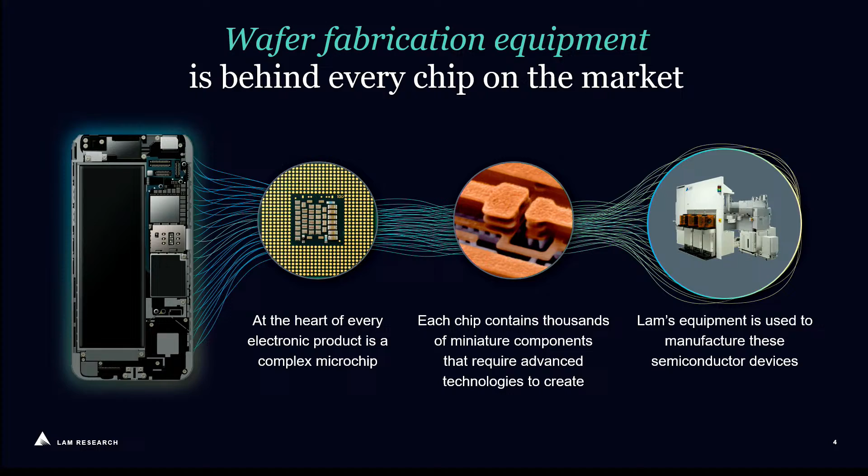In making these processes, there is about 600 to 800 steps, and through these steps you go through multiple steps of patterning, depositing the film that you want, patterning what you want, clean step, and go to the next cycle. Each one of these is becoming more and more critical and difficult than it was before.

When you look at a very simple way of doing it, you're effectively depositing a film that you want to leave on the wafer. You use lithography to transfer a pattern onto a mask that you want to do. You etch and you transfer that mask onto the layer below. You clean, you strip, and you go back to the next step. This step repeats multiple times as you build the devices that you're doing.

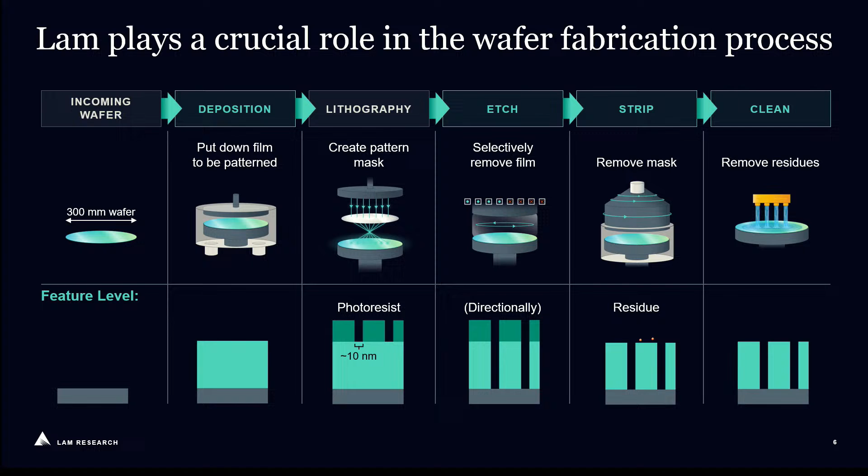Lam Research today is actually a critical player in etch, deposition, strip, and clean, provider of equipment that we have for our customers to be able to do this.

A little bit about Lam Research: the company has been around for 45 years, so 1980 was when it actually came on the scene. At the time, it started out in Fremont, California. Today, the company is about 19,000 employees. We have R&D centers in Fremont, California, about 40 minutes from here, in Oregon, in Europe, as well as close to our customers in Korea, Taiwan, and other places. We have manufacturing sites all around the world. Last year, our revenue was about $16.2 billion, and our R&D budget was about $2 billion.

Quite a bit of that work that we do, of that R&D budget, goes into fueling the foundation for the next generation innovations that we do. But part of that we also use for partnering with university and academia, funding projects in universities, academia, and research centers to be able to jumpstart and fuel the innovations that we need for the next node.

So we have many active collaborations, and over the past, I would say since 2015, we have funded more than 200 projects around the world. And Berkeley is, of all the collaborations that we have, very unique to us because, one, of the proximity, two, the great faculty and students that are here, and three, the ecosystem that's around us as well as at Berkeley.

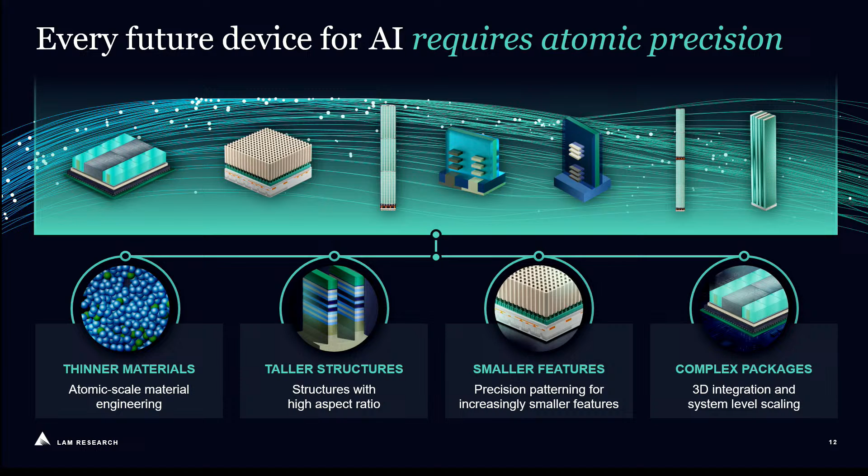Those requirements, in turn, translate into the requirements for thinner and thinner materials that we need to deposit and develop, which basically means that we're getting into atomic scale material engineering with angstrom level precision that our customers need to be able to put these things into production. Taller and taller aspect ratios, more and more patterning, as well as more complex packaging that's required to be able to make these devices, put them together, and integrate as fast as possible. So in a sense, when we look at the requirements, these are the things that drive our roadmap. We need to develop the next generation equipment that can deal with these types of requirements.

Today, the most advanced GPUs are produced with 4 nanometer and 3 nanometer technology in high volume manufacturing, and that relies on FinFET technology. As we go beyond that, next year, 2 nanometer technology, which is gate-all-around technology, will transition into high volume manufacturing. And after that, the next generation gate-all-around, as well as CFETs, would come. These will basically take us into the early part of the next decade as it happens. So today, the state-of-the-art technology in volume manufacturing for GPUs relies on this FinFET.

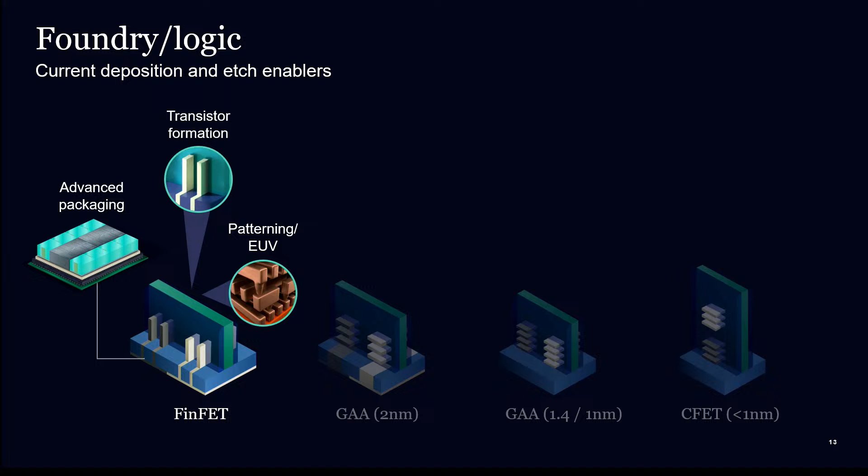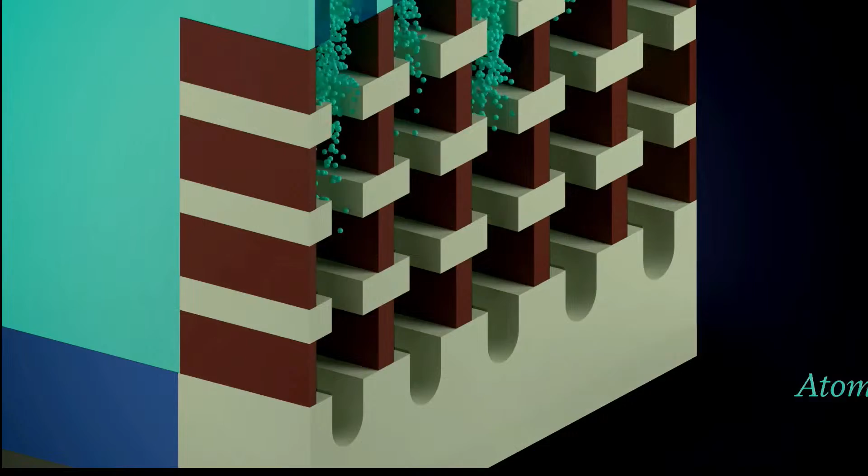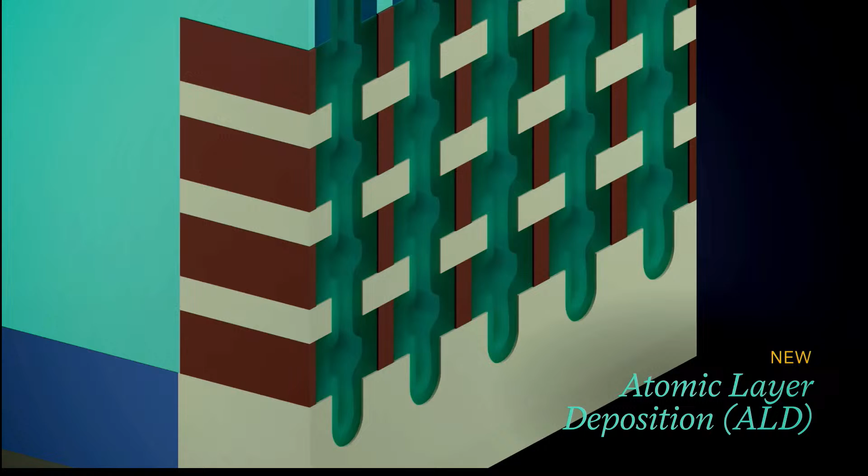So let's take a look at the requirements for the next generation as we go forward. Building the gate-all-around structure requires a number of specialized atomic layer processes, such as selectively etching between the channels, one layer at a time, and using ALD to form the spacer in between them. These processes become even more difficult at the next node because the device gets taller and smaller.

In addition to shrinking the transistors, the wires that connect them together also need to scale. When building such small wires, only dozens of atoms across, many things can go wrong. New EUV patterning technologies reduce these errors and defects. Another approach to scaling is to reduce the complexity of the wiring. Traditionally, the power and signal wires are intertwined. Moving the power wires to the wafer's backside reduces congestion and improves performance. This requires even more copper plating.

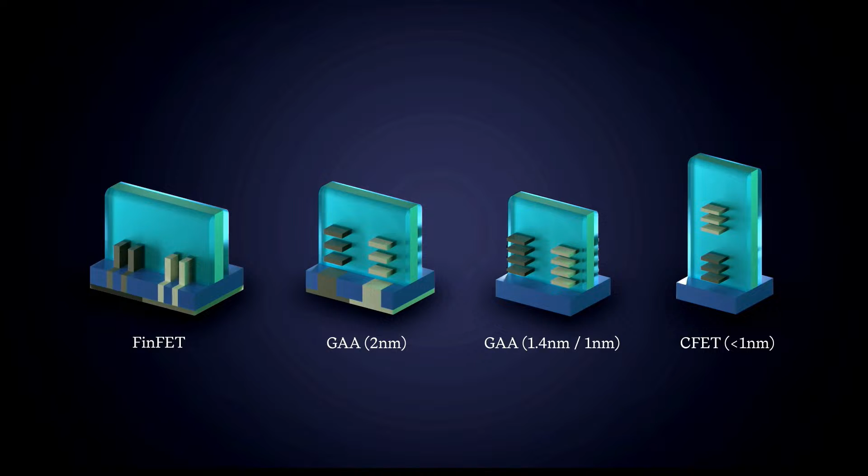Back at the transistor level, the CFET inflection will require even taller structures and additional wiring with more deposition and etch, which will enable the logic scaling journey to continue to the point where there are more transistors on a single chip than 50 times the number of pizza slices eaten in New York City in a year.

So that's what's coming to us. This is the roadmap, at least that our customers have until the end of this decade and beyond that. CFETs will probably go into production by early 2030s.

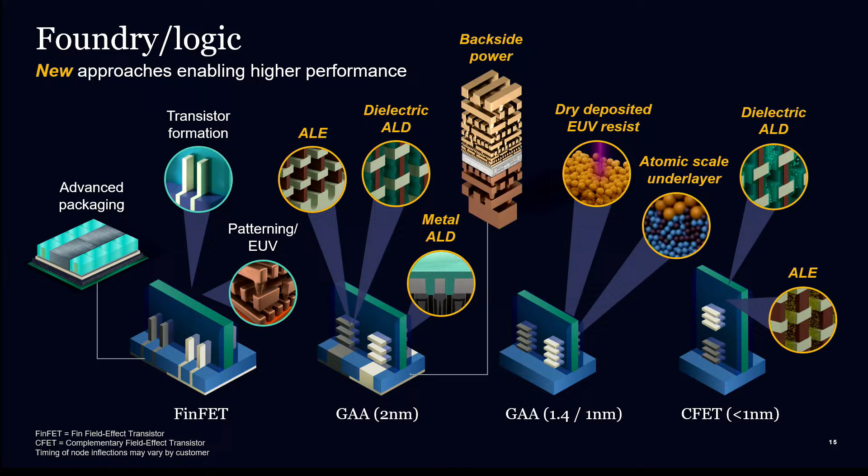One thing you notice is as we move from FinFET into gate-all-around and after that to CFET, you saw how the structuring is done. But you see that the films are becoming thinner and thinner, and a lot of new applications coming in with acronyms like ALE and ALD. There are multiple places where you see these things. So when we think about the future, as we try to make this transition to the next nodes, these are what we see as the grand challenges that this industry is working through to resolve.

One of them is atomic scale precision - films that need to be so thin that they're really not films anymore. They're almost an interface, about 1 to 2 nanometers across, with angstrom level precision that you need to have. I'll talk about this in a bit.

And sustainability - how do we make what we're actually working on more and more sustainable? And last but not least, speed to solution - we need to be able to develop these solutions faster and faster than before. So there are many challenges for the equipment industry as well as for our customers to scale, but these are the three grand challenges that today I wanted to focus on with you.

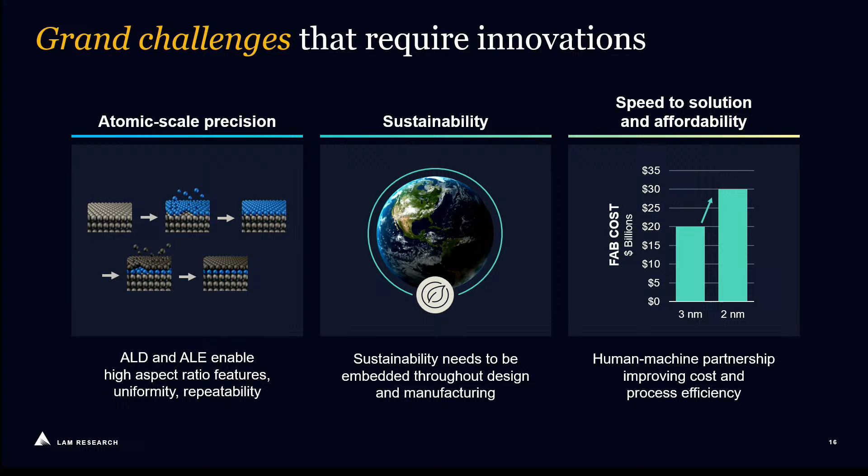Atomic scale precision - so what is ALE? ALE is atomic layer etching, a technique developed to remove one layer of material at a time. Consider a very simple example of silicon etching.

You have crystalline silicon here. If you can bring in halogens to the surface and run long enough time that the halogens occupy every site, giving complete coverage, you get to a saturation regime, and you need to wait until this happens - you run it long enough to give complete coverage to the surface. Then after that, you bring in ions with a very controlled amount of energy to just remove the halogenated layer, not enough to damage the bond below that.

By doing this, you can remove one layer, and then you cycle. It becomes atomic layer etching when you give enough time for the halogens to saturate the surface and enough time for the ions to saturate, and then you go through the cycle over and over again.

When you start depositing films that are only a few nanometers, and you want to remove 1 nanometer of that, you have very little budget to mess with that film, so you need to remove it very, very precisely and in a controllable manner.

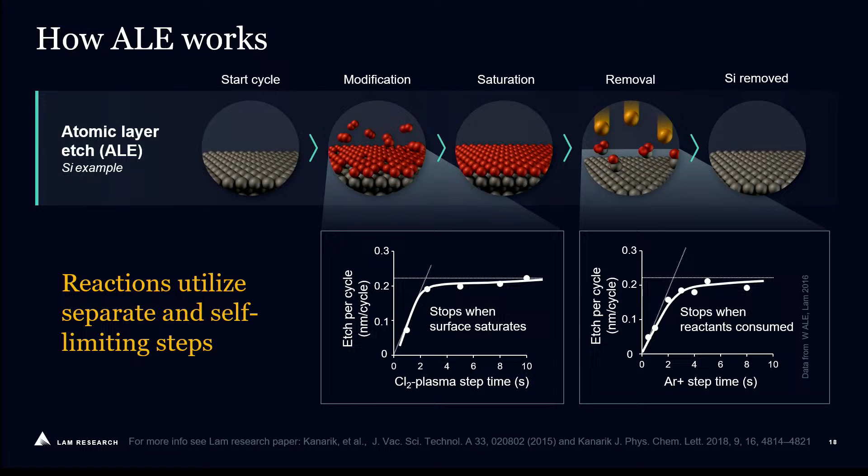So there are techniques, atomic layer etching, that today our customers actually run in production. Obviously, you don't need it for every application - if you don't need that level of precision, you don't necessarily need to do atomic layer etching, but these techniques exist today and are in production.

You can now generalize this concept to atomic layer deposition, where you bring in 2 different precursors to the surface - one to saturate, another to convert - and then cycle.

Or you can also do the same thing with atomic layer etching in an isotropic way, bringing in 2 different species to the surface to convert and then remove, convert and remove. Ideally, it depends on what you're trying to do.

With ALD, it is typically conformal because you deposit it very conformally over the whole structure. So you deposit a very conformal film that has the same thickness whether you're in a small area or large area, at the bottom and at the top.

When you're doing anisotropic or directional ALE, you're only removing the bottom and you have anisotropy, so you go down. When you're doing isotropic ALE, you remove the same amount from all surfaces in a very controlled fashion, but regardless of the spacing, without distinguishing sidewall and bottom.

So we need to develop these types of techniques as we go into the next generation. Gate-all-around and 3D transistors all need these types of techniques as we go through it.

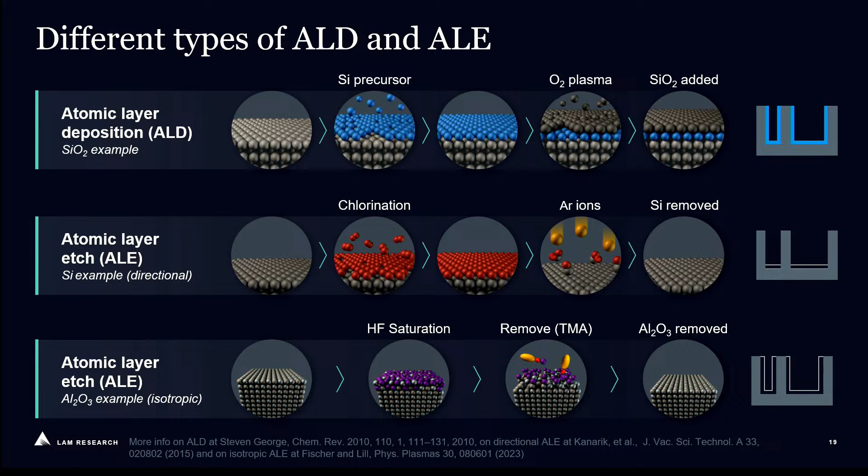So the good thing about ALE and ALD is that you can actually etch or deposit, in this case, the same amount, whether it's small features or large features. You can do a conformal coating, and in the case of ALE, you can etch to the same depth regardless of the opening.

You can deposit it very uniformly across the wafer, with wafer-to-wafer repeatability at angstrom level precision. But it's expensive because you have to wait a long time for those purges. Everything we're doing is to try to make that faster, optimizing the reactor volume and the purge schemes.

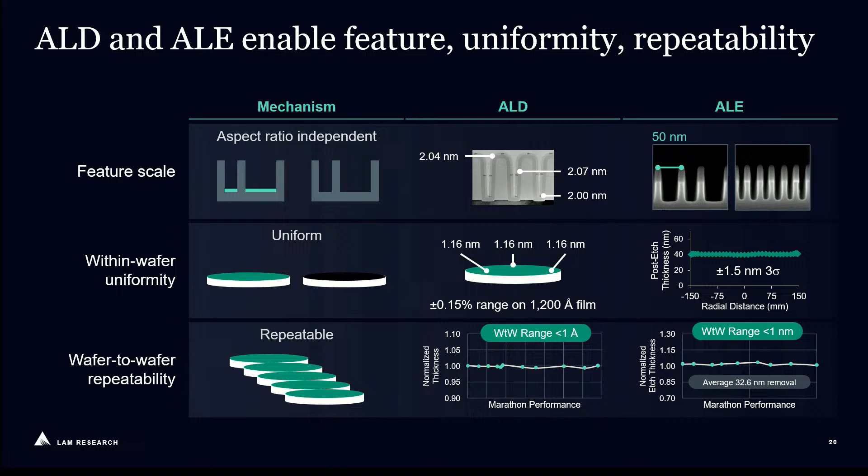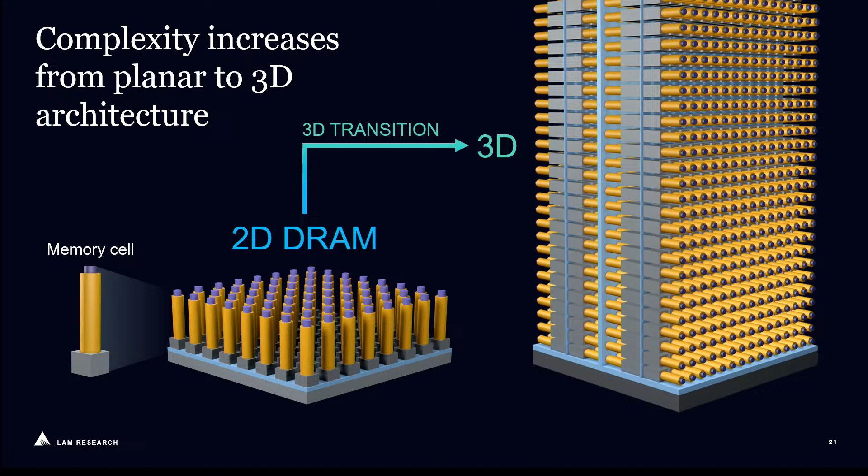As I mentioned, all sorts of devices are going from 2D to 3D. Today's 2D devices are made by shrinking in two dimensions and printing. If you go to 3D, you need to make the same device, but on the sidewall. Traditionally we've relied on ions to give us anisotropy to etch top down, but it's very difficult to get ions to go 90 degrees.

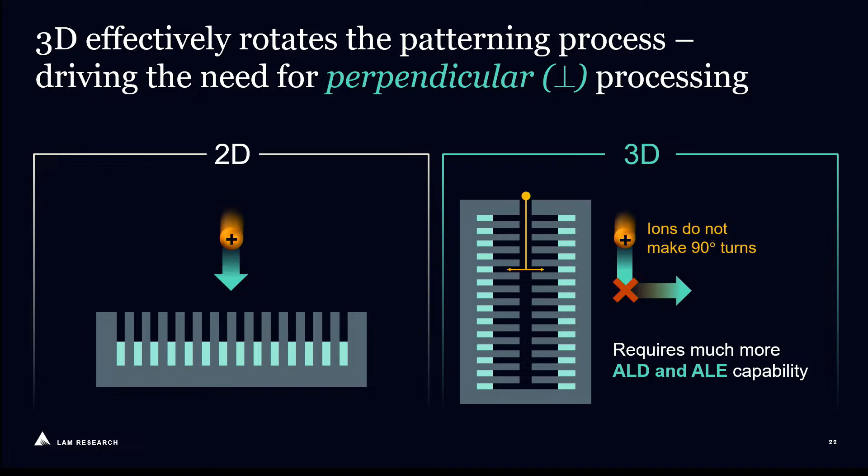So what you need is more ALE and ALD. You need to recess to a very known depth, uniformly top to bottom, and deposit exactly the precise amount you want. These are challenges we need to work together to resolve as we go into the next generation. The good news is ALE can give you very good top-to-bottom control, but you end up needing to recess a lot of material with selectivity to some other material.

You may be recessing molybdenum that needs to be selective to oxide. You may be recessing silicon that needs to be selective to silicon germanium. You may be etching one material.

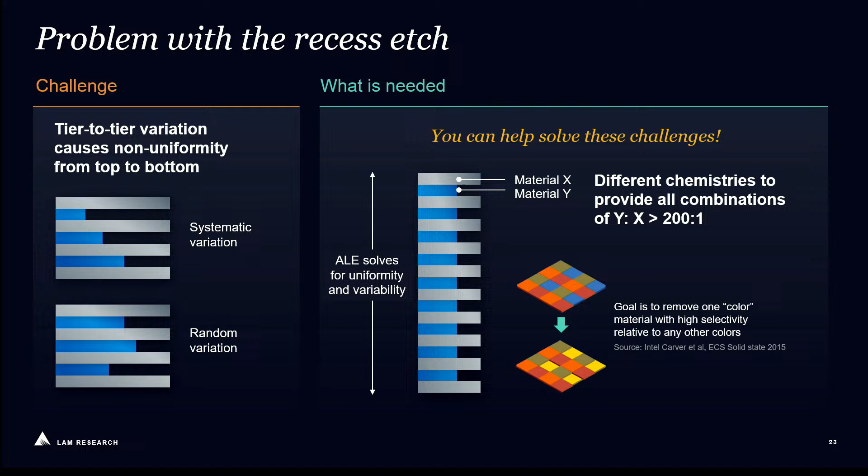A few years ago, Intel published a paper called the 4 color problem: you want to remove one color without touching any of the others. As we go into 3D DRAM, you end up with the 50 color problem — all these materials that need to be removed selectively with respect to the others. This is an area we need to work together on; we need a lot of innovations. Many of these solutions don't exist today.

The next challenge is that as you build these devices, you need to create the channel. This surface needs to be crystalline level and precise, but it also needs a very precise shape. In this case, this is from a simulation of the features.

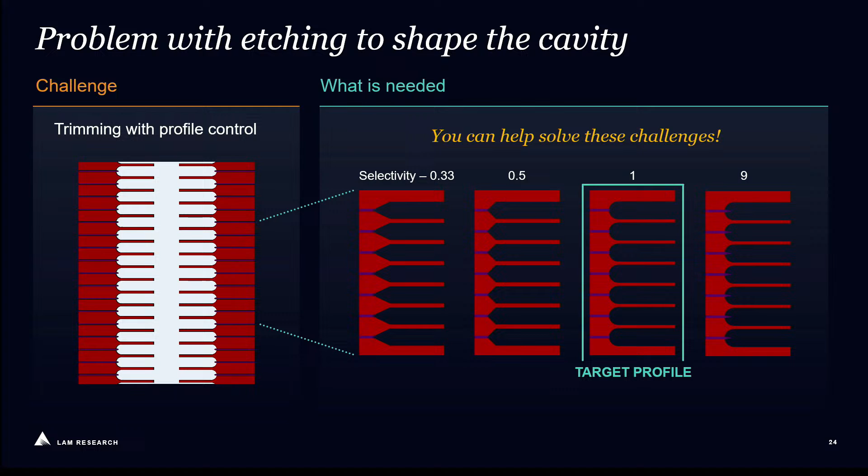As you can see, if you toggle the selectivity of one material to the other, you end up getting very different shapes. You can control the thickness as well as the overall shape. Depending on the target profile for your integration, you have to tune these selectivities — again, a lot of areas for research and innovation needed here.

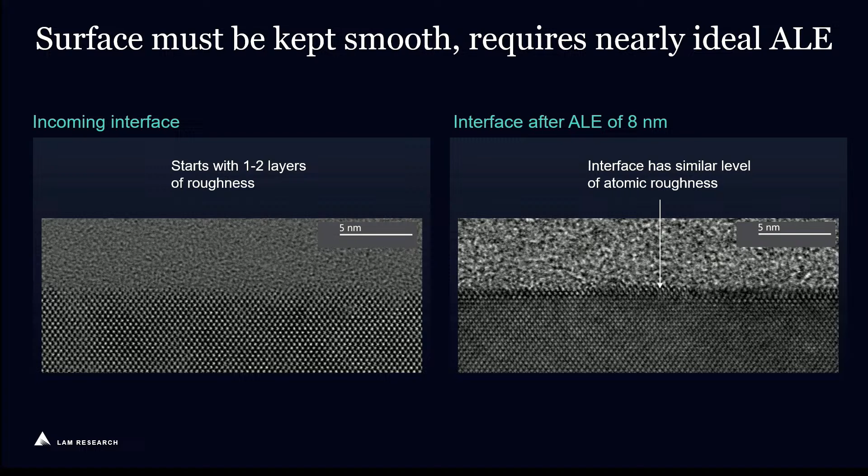You need to do all of this while the material left behind has to have atomic layer precision. That's the challenge we're seeing as we go forward.

After etching, you need to deposit a film into these gaps uniformly top to bottom without any seams or holes. Imagine this could be 6 to 7 microns deep with an opening of about 35 nanometers that you need to fill. And you have to be able to do this — so we've developed some techniques.

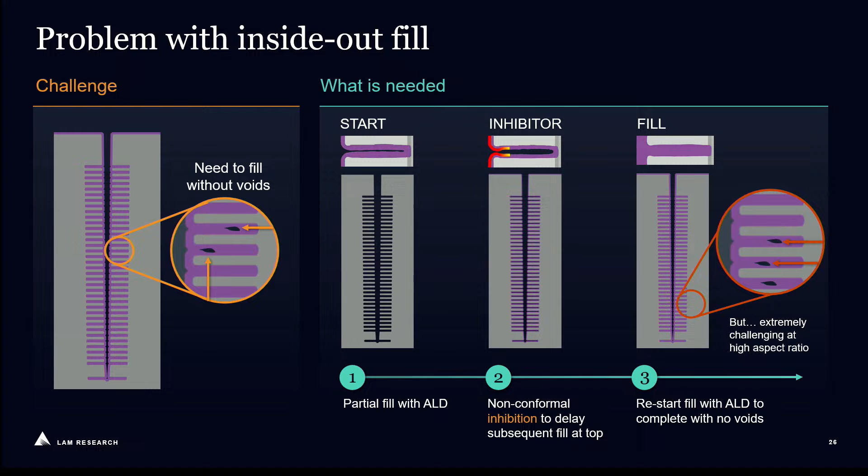For example, we have a technique where we do an ALD deposition to a certain amount, then inhibit the front so no deposition happens there, and as you continue depositing, it fills in from the inside out. That works up to some aspect ratios, but beyond that you end up getting voids. This is another area that's really ripe for collaboration and innovation to get us to the next level.

There are also other techniques combining etch and deposition to achieve better fills. But as you can see, there are a lot of challenges with top-to-bottom uniformity, seams that form, and so forth. If you cannot overcome this, 3D DRAM cannot go into production with these types of fills. It needs to be done without any seams, holes, or voids.

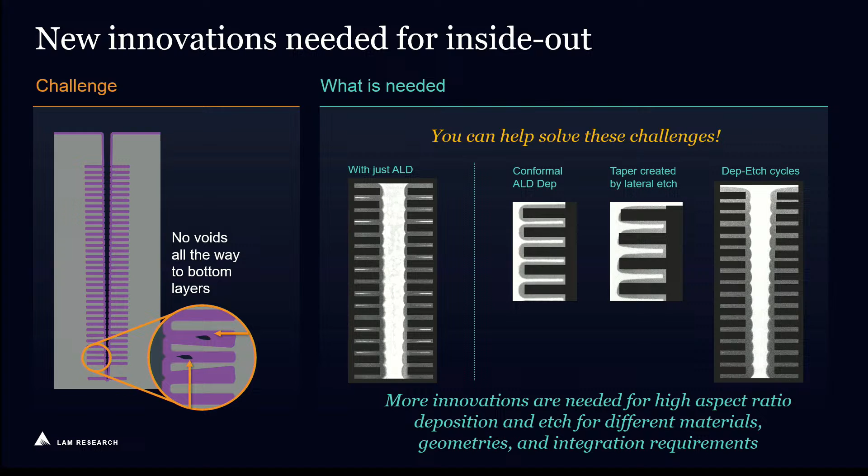So I hope that gave you a little glimpse of the type of processing our tools need to do as we look into the future, and some of the challenges we have on the atomic level scale. The next challenge I want to outline for you is sustainability.

Overall, sustainability falls into three different buckets: the energy consumption and direct emissions that every company has from our own facilities, the energy and indirect emissions we have from the energy that we purchase, plus the indirect emissions from the tools that we sell to our customers. So when we say we want to be net zero, we have to be able to satisfy scope 1, 2, and 3.

And this is not just Lam Research. We, plus our customers and our suppliers, the whole supply chain needs to work together, because effectively our scope 3, the emission that we have from our products, is the scope 1 of our customers. If we cannot achieve net zero here, our customers cannot achieve their goals either. So the whole supply chain has to work together to bring this in. This is why it's an industry-wide challenge that we all have to work together to be able to meet.

One of the challenges in this area is the gases that we use today. Some of these gases have high global warming potential. For example, gases like SF6 and NF3 have very high global warming potential. But these gases are the ones that we've been using in this industry for the longest time. For the past 60 years, we've been using SF6 and NF3 as a source of fluorine generation in this industry. And the global warming potential of SF6 and NF3 are significantly higher than CO2.

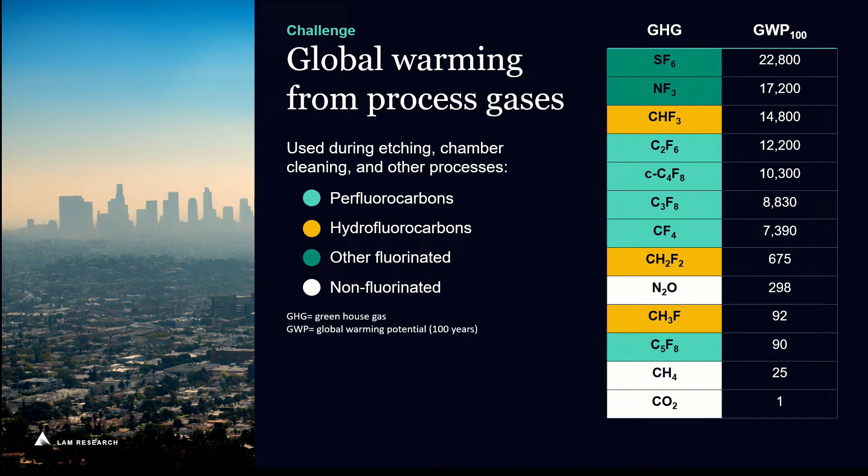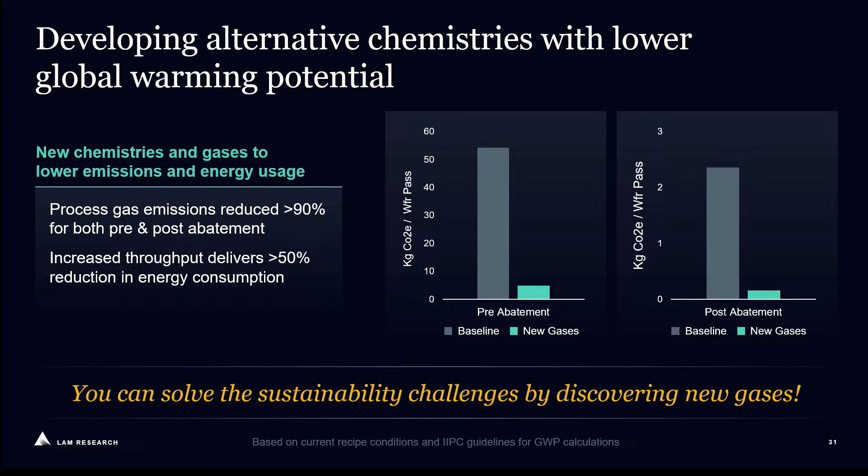So we need to be able to come up with substitutes for these gases that we can use, that our customers can use, and the whole supply chain for these gases needs to be put online. The good news is there are cases where we have actually demonstrated this. One case is etching high aspect ratio holes, where we developed new processes and new gases that delivered significantly lower emissions compared to the baseline, but at the same time delivering much better on-wafer performance for our customers. So cases like this exist, and we just need to do more of this work.

Another part of sustainability, and that's why it's a big grand challenge for us, is the overall energy consumption that we use in the entire system. The tool that we have is connected to a lot of equipment in the subfab, which could be chillers, pumps, and others sitting there. When we develop virtual twins of the system to understand where the energy is being consumed the most, we know that thermal management, power delivery, and abatement are some of the big ones we need to identify. And there is a lot of room for improvement, especially on the overall thermal management of multiple systems that we have here.

For mechanical engineers in the audience, this is a great place to actually start focusing on and looking at how we could come up with more agile systems for improving the thermal management and reducing the amount of energy used in these areas—basically making the system more and more efficient, which is good not just for the environment, but also for overall reducing the energy consumption of the fabs that are running.

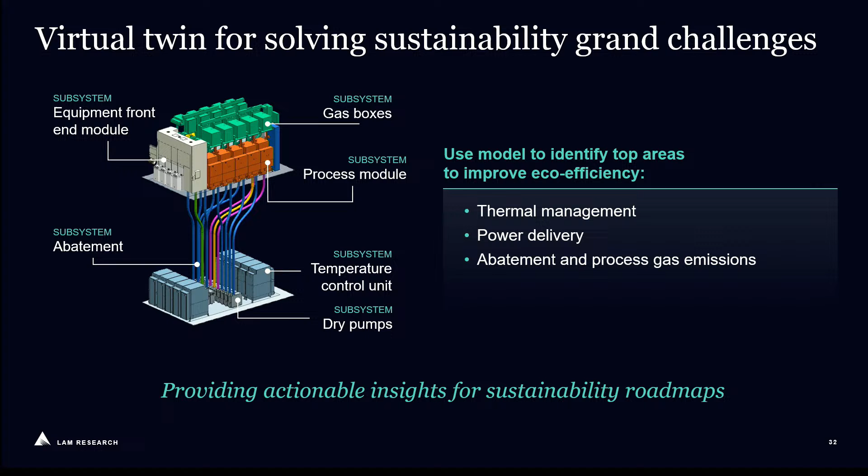Last but not least, I wanted to talk about speed to solution. As I presented here, the roadmaps in all the different segments of the industry are accelerating. And as we go to the next generation, the challenges are building up atomic level precision and others, and the tools that we're developing are becoming more and more complicated than before. There is Moore's Law, which you all know. At Lam, we have something we call Lam's Law, which is every year, the tools that we're delivering to our customers, to break the trade-offs and deliver solutions, have more knobs on the reactor.

So time is money. If it takes you a longer time to do it, the cost of R&D goes up, and at some point it's just not sustainable. So together, we have to innovate and come up with ways of delivering solutions much, much faster than we were able to do before.

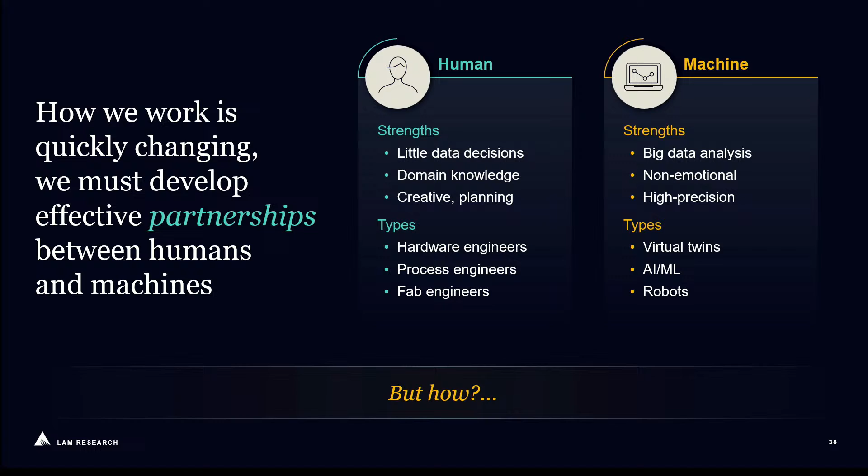So the question is, how do we form this partnership to bring in the experience, bring in the intuition, and go together with computer, with AI, with machine learning, to deliver the fastest solution that we can. So let me give you an example.

Today, if you want to buy shoes, what do you do? You just go to your search engine and put in that you want to buy shoes. The computer goes out there, does a survey, and comes back to you with a whole bunch of different solutions. You take a look at those solutions and make a decision. So this is a case where the computer goes first, you ask a question, it gathers, and then the human makes a decision.

When you look across the industry, we have these partnerships between humans and machines everywhere. In aerospace, every part of the airplane—engines, wings, the overall system—everything is modeled first on a virtual twin, and then after that you bring it in and build it. So modeling of the entire system is adopted and done regularly, basically every day, when you do these aerospace designs.

Pharmaceuticals—the space is very, very rich. It's very similar to the process development activity that you do on reactors. So biologists first need to come in and tell you exactly where you want to start with the right protein, the right DNA, and how you want to change it, and then after that you use machine learning in order to optimize it.

Whether it's automotives or Amazon, we are seeing more and more robots being created and put into manufacturing. It's not just to do the job for cheaper, but to do it with more precision and better than what engineers can do for those tasks. So these are three different examples of partnership between engineers and computers, between humans and machines, being done across the industry.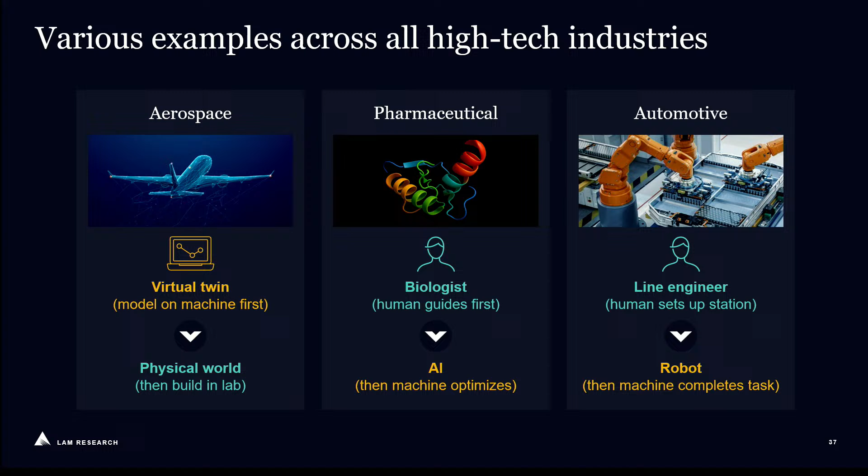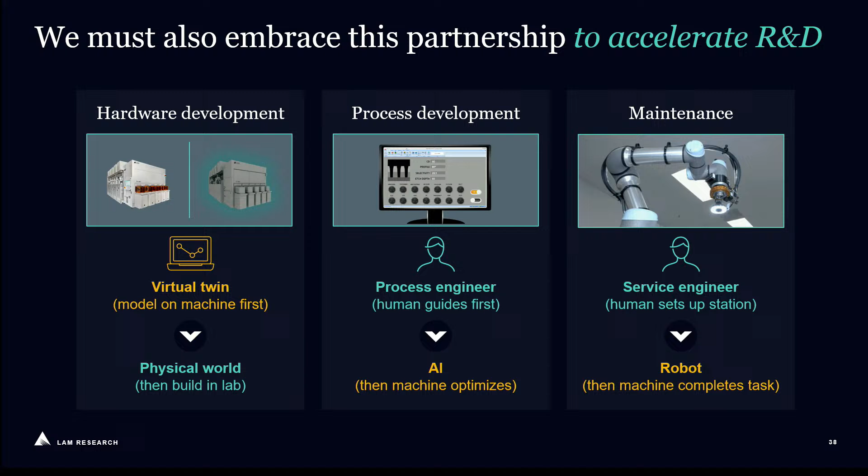If you look in semiconductor manufacturing, we're also doing exactly the same things. We are developing virtual twins to model the reactor before building a reactor and cutting metal. For process development, we're also trying to accelerate our process development activities. And at Lam, we're also developing robots that our customers can use for servicing their tools.

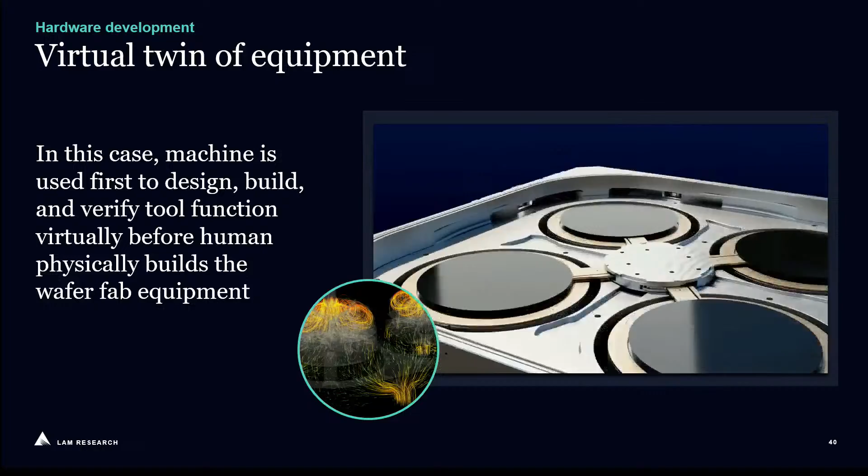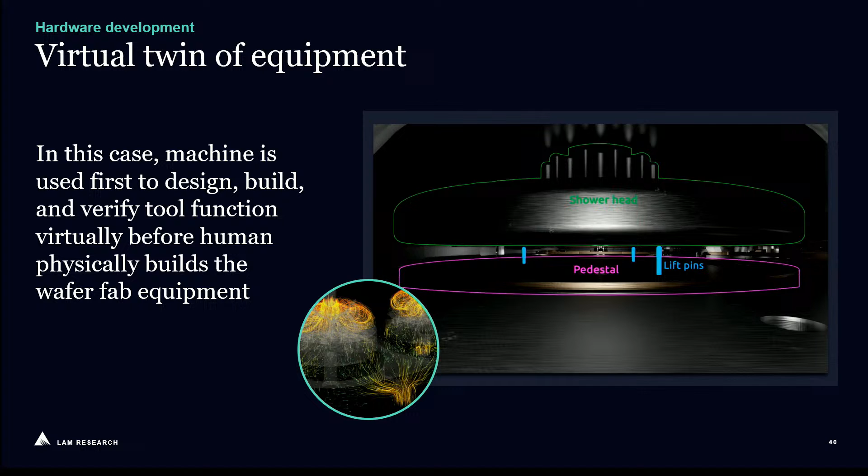So for hardware development, more and more we're doing reactor scale simulation to look at the flow, look at the plasma creation, and how the whole system comes about—to model it as much as possible, designing the edge rings, designing the overall system before we cut metal, and even when we want to improve it, what can we do to do it better and better?

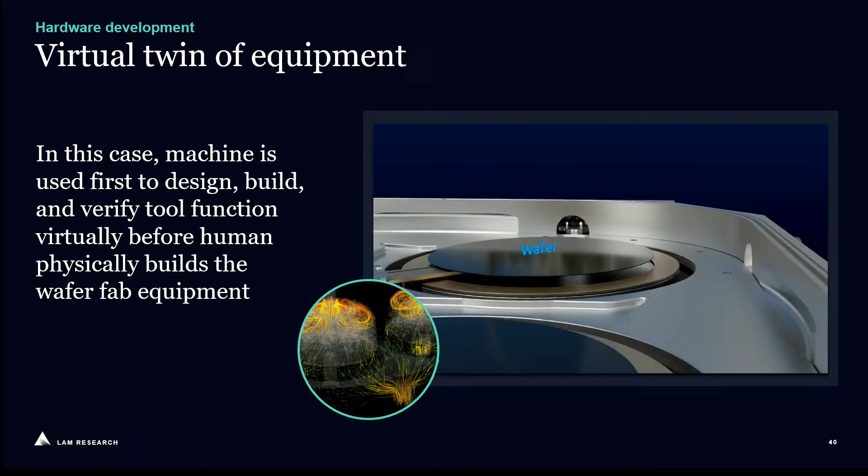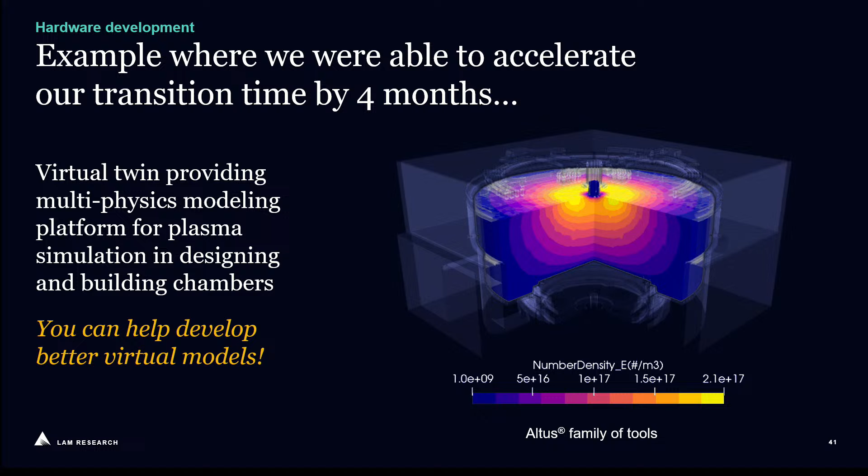We have plasma models that we use today to simulate the model, but these models can improve. In fact, one of the projects we're working on here with Professor Lieberman and the team is to try to see if we can collaborate to enhance the simulation capability of these reactors and bring in more widgets into it.

For process development, several years ago—about 2 years ago—we developed a game to benchmark how humans would do process development versus machines. It was a very simple game that we put together. We said this is an initial profile that we would try—it's given—and we would like to get to this profile.

We have 10 parameters. Go ahead and do the process development. Whoever comes up with the fastest solution, the least number of experiments, would win.

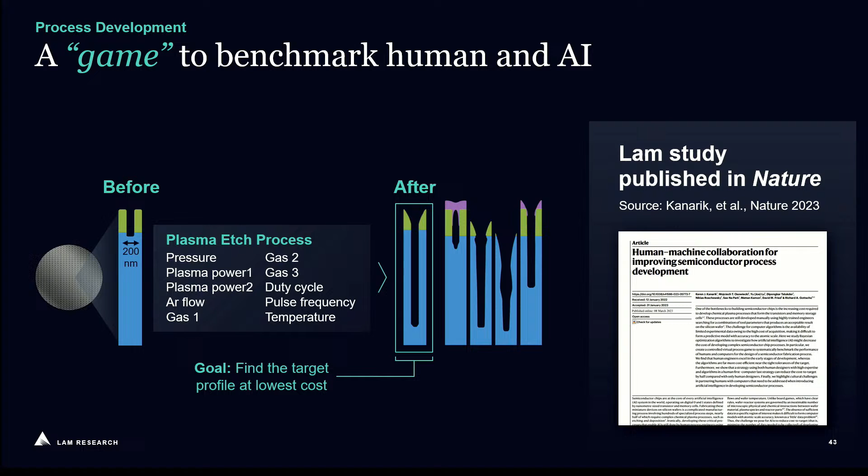We gave it to a machine, and we asked a machine to do it. It actually took about 739 steps, and it had no idea where it was to be able to converge.

We gave it to an experienced engineer, and you can see that experienced engineer started out and within about maybe 15 steps got to about 80% of what their target was. And after that, it took about 80% to go another 20% to be able to converge. And it took about 105 steps.

Certainly, the experienced engineer did it faster than the computer without any guidance. But it was fastest when humans started first, and after we had the directions and the baselines, using a Bayesian algorithm or any algorithm in which you would look at the slopes and the gradients, we'd be able to converge much faster. So this partnership where you start out with humans and then transition to a machine in order to do machine learning process development activity is the one that actually gave us the biggest bang for the buck. And you can see why.

We have intuitions based on the experience that we have. We could do single variable process tuning and optimization, and you can get there really fast. But when you get into this space, you have to do 4 or 5 or 6 variable optimization in order to get there. And it's very hard for people, even for an experienced engineer, to do it. It's a lot easier for the machine to do it.

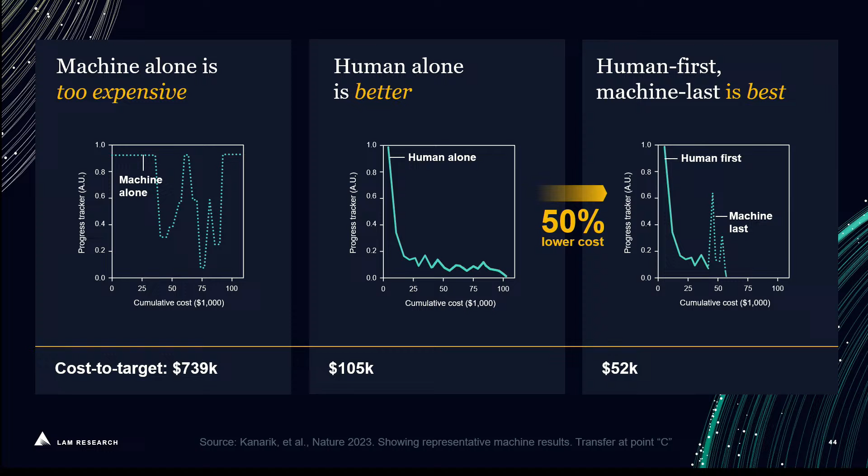So the problem that we have is very similar to the biologist that's doing the experiments. We don't have a big data problem. We have a little data problem. We start out with very few number of data points, and we're in this space that has 10 to the 18th different solutions, and we're trying to optimize it there.

So if you have very few points, it could be an elephant or it could be a caveman drawing on the wall that you're trying to get to, and you have no idea with the number of points that you have. So this is actually real data from some work that we recently did and published.

You can see the engineer did about 40 or 50 experiments. Then it was given to AI-assisted process development, and the process development actually worked and converged. And it was much faster than what we could have done before.

So today, we're actually forming those partnerships. We're looking to see what we can do to be able to accelerate the overall process development and reduce the cycles, speed up the cycles of learning.

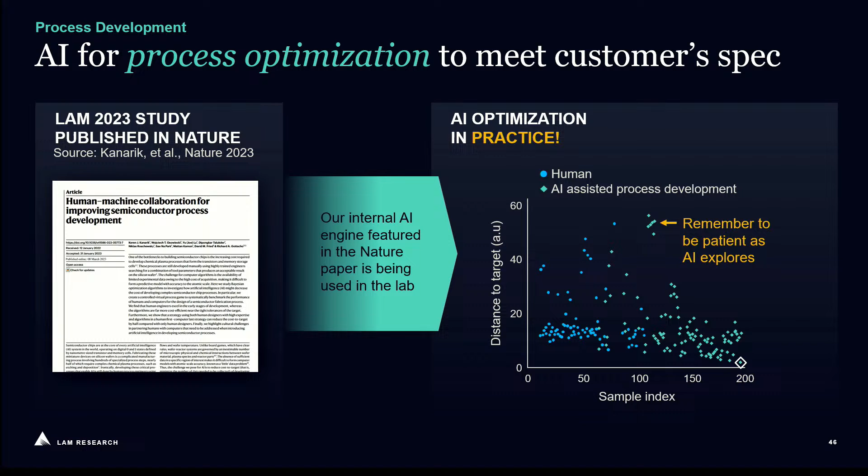One thing that is an active area of research we're working on: if you solve one problem and have developed the baseline, reached the target, and have all this data, how can you use that for the next project you're running? This is learning and data transfer. How can big data help little data? How can one set of experiments help you with the next set of experiments that you want to do?

This is also work that we're doing with Professor Costas Spanos here to actually be able to do this type of development. So this type of algorithm development and overall machine learning is also what we need to do to be able to deliver our solutions to our customers faster. So this is the other grand challenge that we have to work with.

Last but not least, robots. Robots in the workplace.

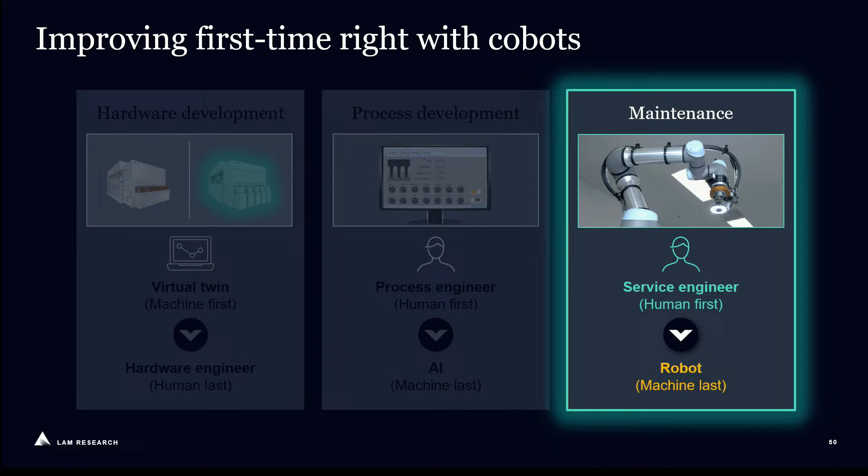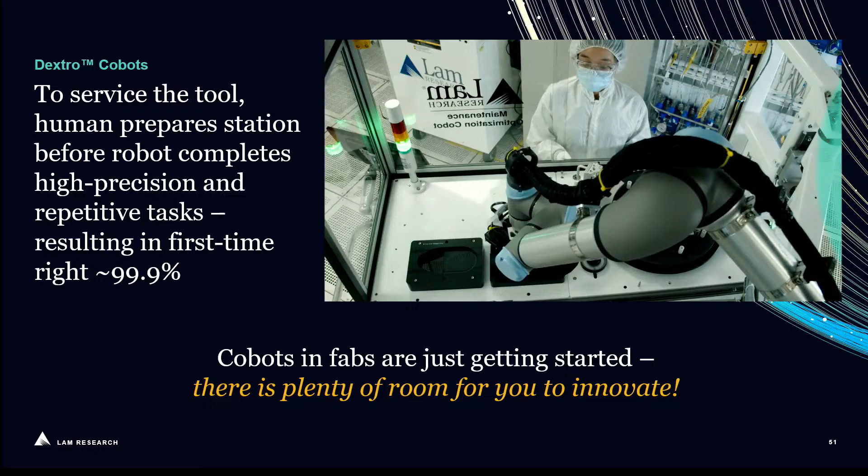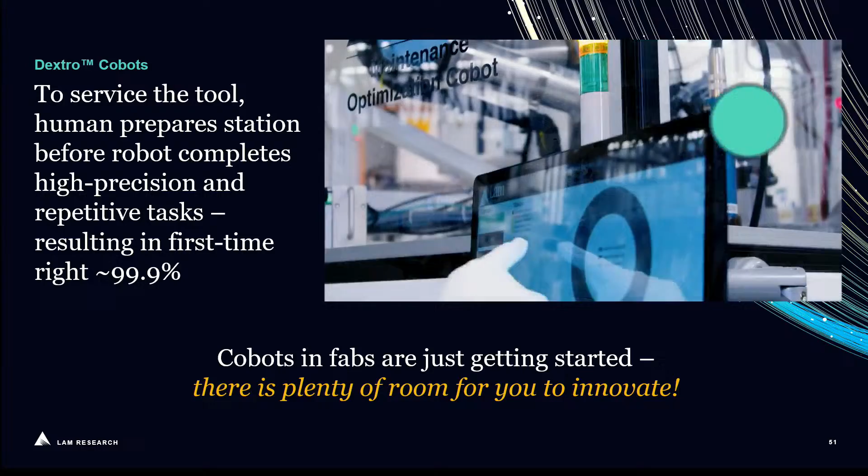At Lam, we have developed these robots that are actually in our customers' fabs, and the robots work around the engineers. So this is not like you just put a robot in there and walk away. They actually work around the engineers, and they can do very repetitive tasks with high precision. Our customers want to use these more and more because the precision of placing the parts, and doing these maintenance jobs over and over again, is very high. Our customers want to be able to service the tool, maintain the tool, and keep it up and running. We have demonstrated first time right of 99.9% with these robots. Just the same way as in automotive, just the same way as at Amazon, in the next few years you'll see more and more of these robots happening here too.

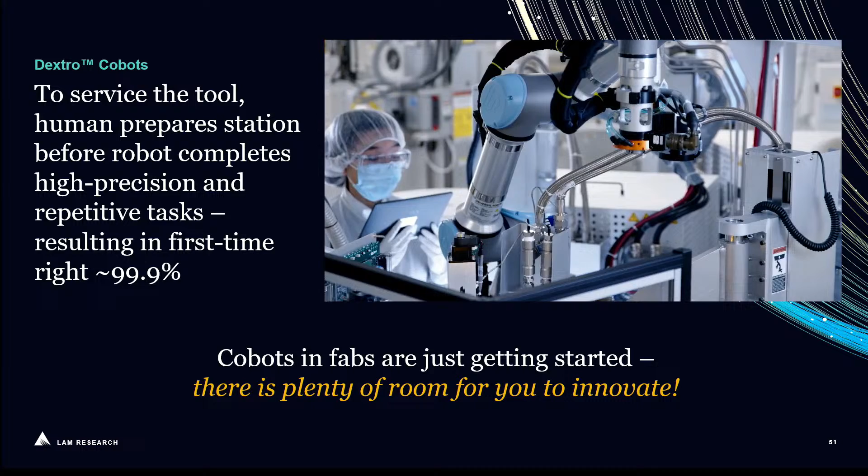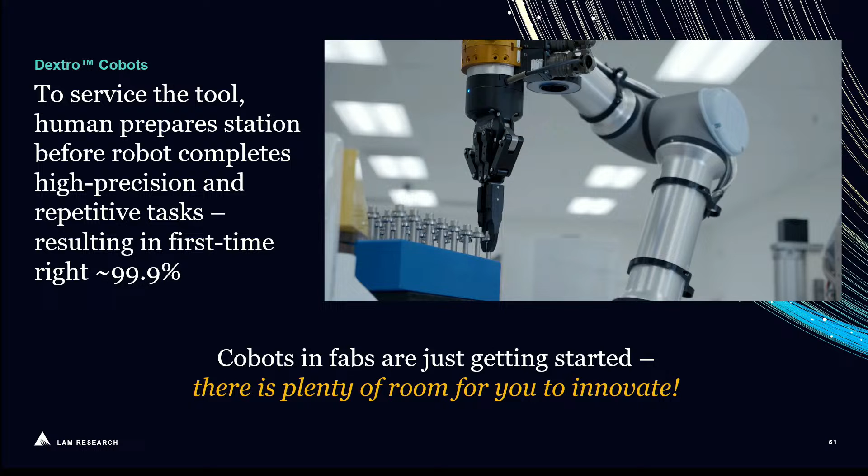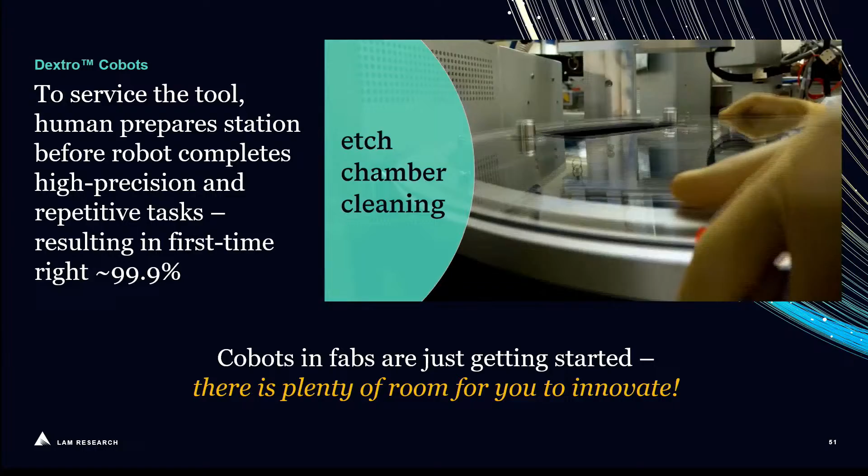Again, it's not a cost issue, it's more about repeatability and precision, and that's why it would be adopted. This is not about taking jobs away from engineers, it's about making engineers more productive and making sure we can do these things over and over again. We call these cobots, or collaborative robots. The name of this particular one is Dextro, which we're running.

I hope you got a glimpse of the future and the challenges that we need to work together on. We need to form a much better partnership, and we need to be able to adapt to the AI era, learn, and speed up the development of everything we're doing. With that, I wanted to acknowledge my colleagues at Lam, as well as other partners that we have, for putting this together.